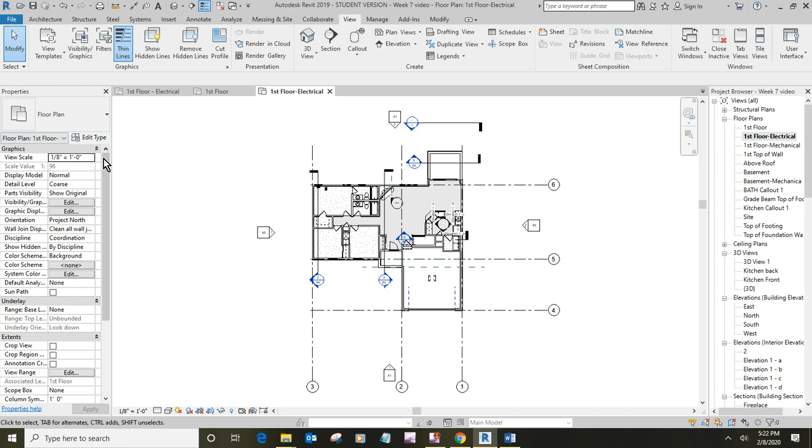All right, looking at my notes here, we duplicated that. We're going to make some changes over here, make it a 1/4 inch plan. For discipline, we may have to flip back and forth between coordination and electrical, but we're going to go with electrical to start with and apply that.

That grays out all of our walls, gets rid of all those notes and dimensions, those pesky things that we don't really want. Was there something else I needed to see here? Not for right now. Okay, if you have a template applied, we want to change that back to none.

Now let's set our view range. We're going to go top of wall for the top because we've got that sloped ceiling that we've got to be able to pick up, so I'm going to make that 4 feet. I'm going to leave it at 6 inches. My cut plane, I can leave it, but I'm going to make that 4'6" so it'll be above the wall switches. Bottom can stay at 0.

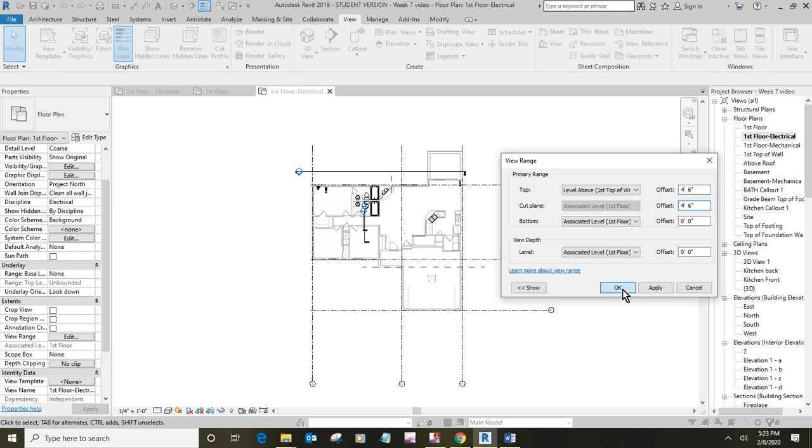Okay, now since we popped this over, our discipline over here to electrical, there should not be any ductwork. Well, we got some showing up right there. Oh, put them in the video thing. So let's go to visibility graphics.

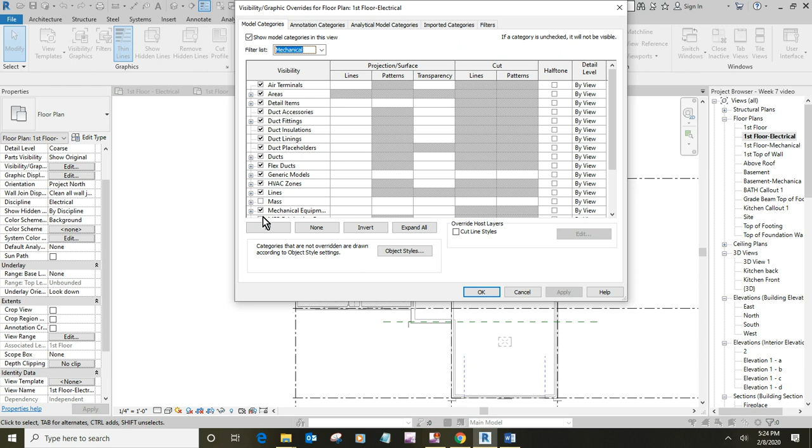And I'm going to turn on mechanical and turn off architectural. And I'm going to go select all, and I'm going to unclick all of them and go back to none. Let me see how that works.

Oh, it got rid of my detail items, so let me turn my detail items back on. There was something else, generic models maybe. Yeah, okay, so I'm going to leave those turned on. Lines, and let's see, I want to come down here to, oh, they're not showing up.

All right, so that's got those things taken care of. Floors, now that was just mechanical. Okay, now I'm going to turn my architecture back on, and of course there's a bunch of things in here that I can turn off. I got no curtain walls in here. Door stuck, the electrical should be turned on there. Entourage - I don't want no stinking entourage.

Okay, for floors, I want to hide my surface patterns. Got no parking inside, no planting, no roads. Roofs, got no roofs, no shaft openings, no site, no topography. Okay, those things.

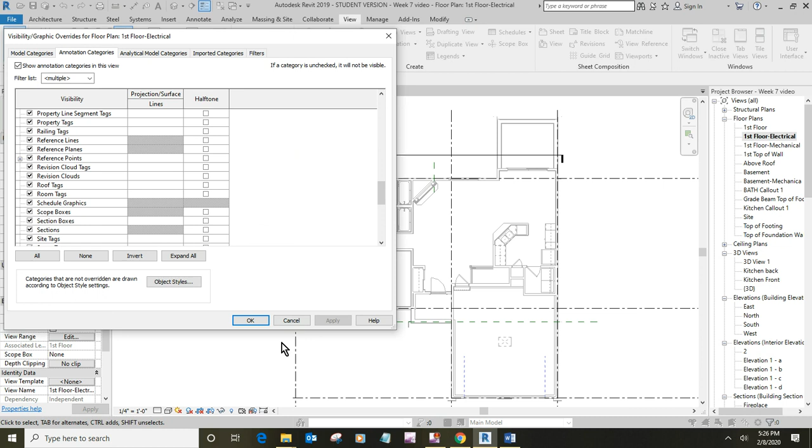Okay, they did not copy over. So we'll want to tag the rooms, and I'll show you my finished plan right here. We're using the same room tag families that we had before, and we just want to hit the major rooms. We don't need the closets and the hallway tagged, just tag your major rooms.

We want to make sure that attic access is showing, if that thing got turned off in visibility and graphics. The closet shelving is maybe okay - let me go back and look. Yeah, closet shelving would be okay, but definitely want to make sure the attic access is shown.

All right, now we're going to place some lights. So in doing that, we're going to go to our reflected ceiling plan for the first floor. All we're going to do is use this to place our lights, and I'll give you the finished drawing so you'll see what they look like.

But we're going to bring in some light families. So we're going to go Systems, Lighting Fixtures, and yes, we want to load some. Let's go to Lighting - I had architectural on my notes here, internal.

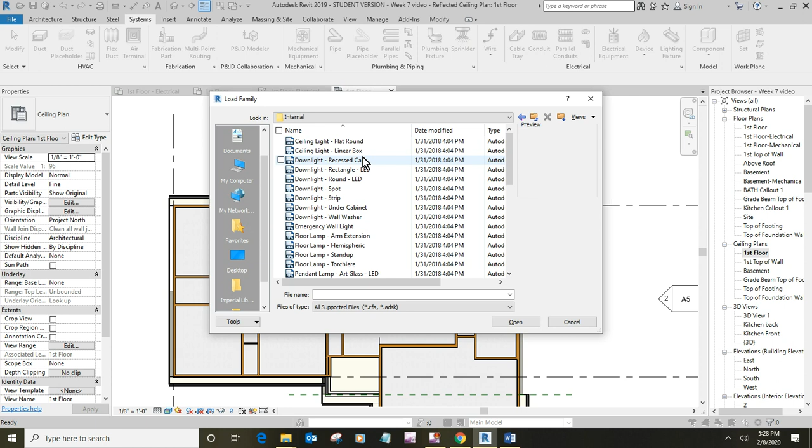And the first one, I want to bring in this ceiling light flat round - that's what I want to bring in first. Okay, and you look at it, there's options here for the wattage and the voltage. Everything we're doing is 120 volt, so I'm just going to stick with that.

And the elevation right now is set at 8 feet, but when we go to put it in, it's going to snap - it should snap to the ceiling.

Trying to think where these go. I'm pretty sure there's one here. I'm just going to pop a couple of them in here for you to see. Okay, so there it is in my reflected ceiling plan looking up. If I go to my electrical plan, there it is in my electrical plan.

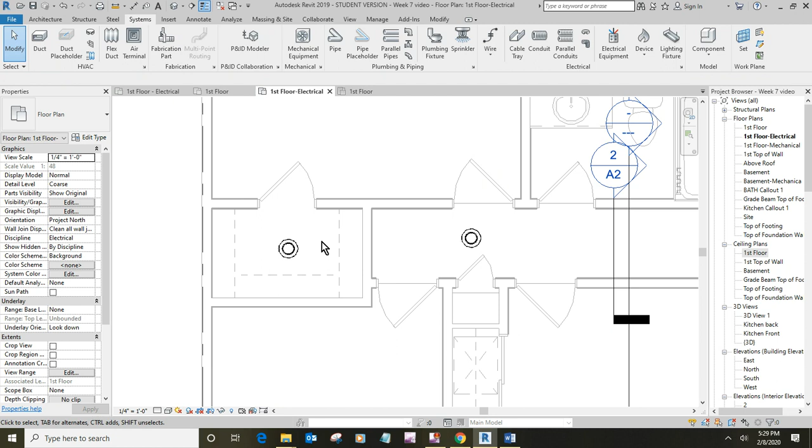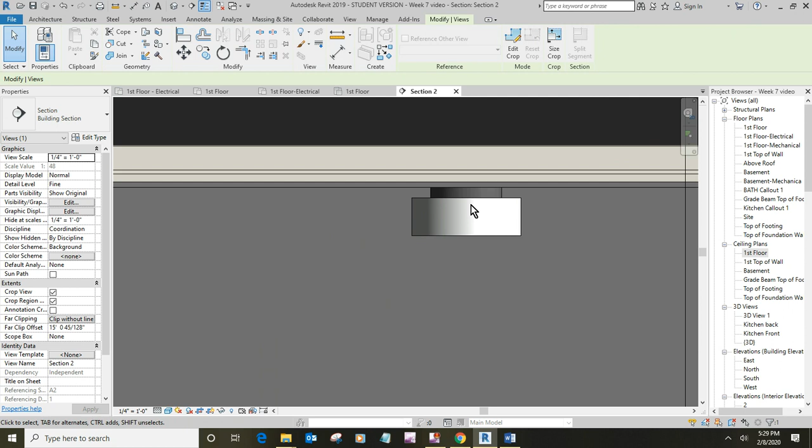I'm going to pull that section through there. And so here is the light itself, and you can see it's attached to the gypboard ceiling, which is this right here. Okay, so let's go back and look at this plan.

So we've got surface mounted lights here in the hallway and in the foyer. The kitchen gets mostly recessed can lights. I got surface mounted lights in the garage here. Recessed can lights in the kitchen and the two porches, and I put ceiling fans in the 3 bedrooms.

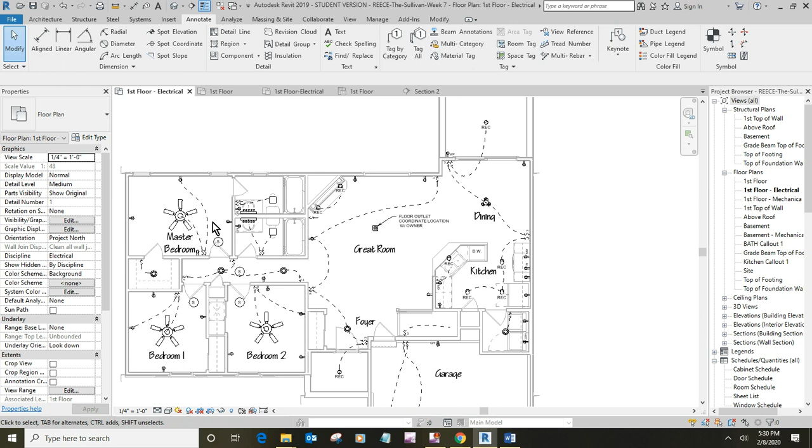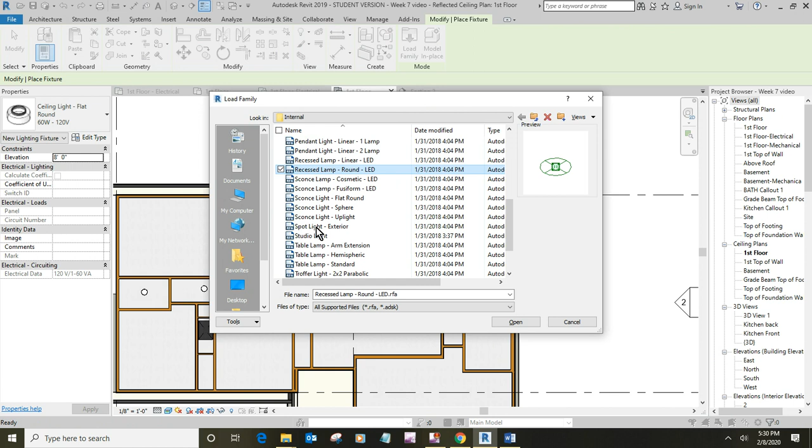All right, so let's go back to the reflected ceiling plan, and we'll bring in the recessed can lights. So we're going to go recessed round - yeah, that's what I want, recessed round.

And I'm pretty sure just a 4-inch trimmed downlight is what I brought in previously.

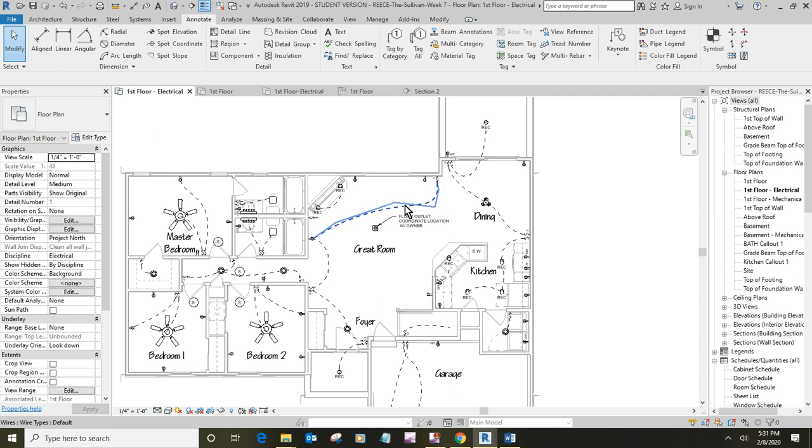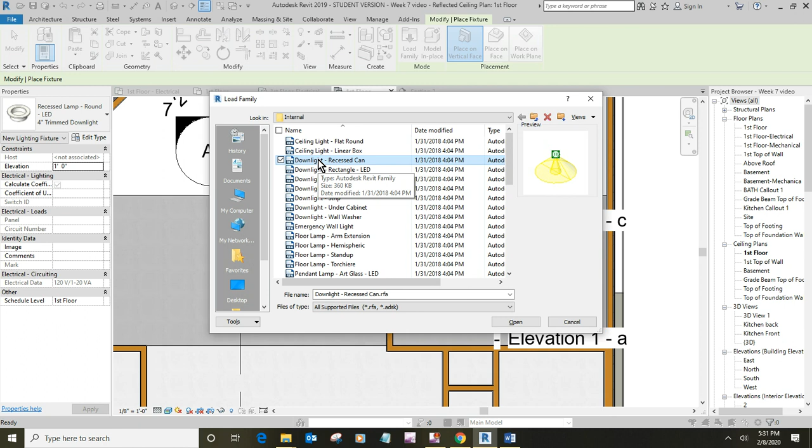And what you want to do - hang on just 1 minute. Downlight recessed can. Okay, so that was the wrong family that I loaded. Let's go back. Sorry - ceiling plan, systems, light fixture, load family, recessed, downlight recessed can. That's what I wanted right there. Sorry about that mistake.

Okay, and now this is going into a ceiling, and you can't see your cabinets here, so you just have to know that you need like one, two, three, four - I think 5 lights in here, 4 lights. So place you some lights.

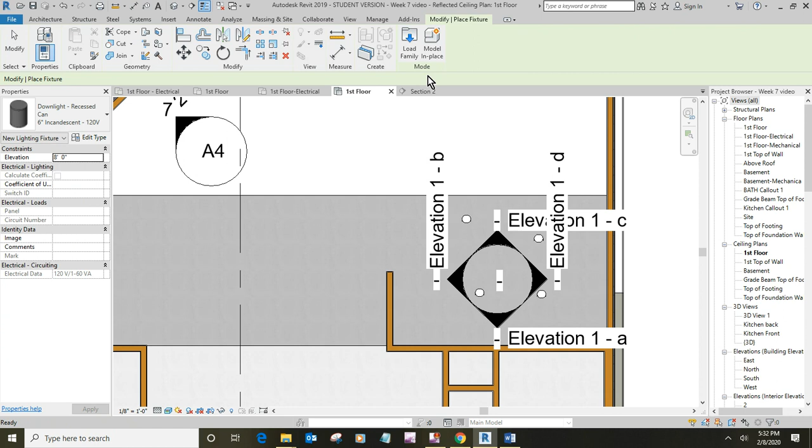I didn't even think to look at the options on that. Okay, so there's not a choice on where to place them out. All right, so place a number of them in there and then go back to your floor plan, and then you can see them to get them in the right

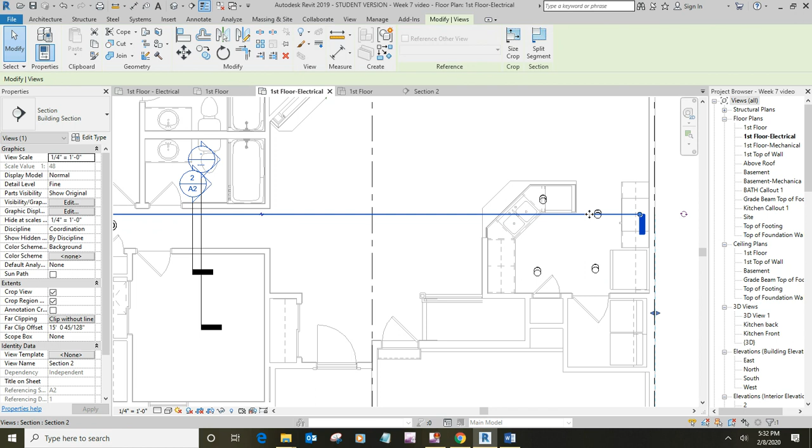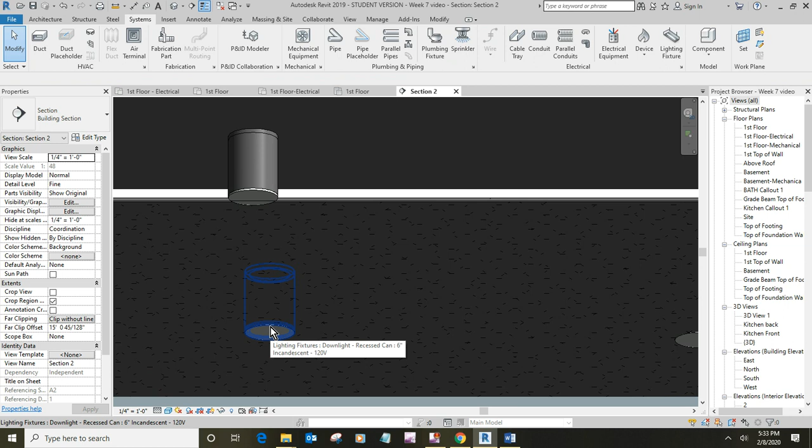location that you want. Now then, let's go to our section view and we'll look at. So here's what they look like right here. Okay, and if I do not crop my view, there's what it looks like going up into the ceiling. But it's popped right there onto the front of the ceiling.

Now I'm giving you a couple of the fixtures. I'm giving you the chandelier and the ceiling fans. So let me go to where I've got those saved at.

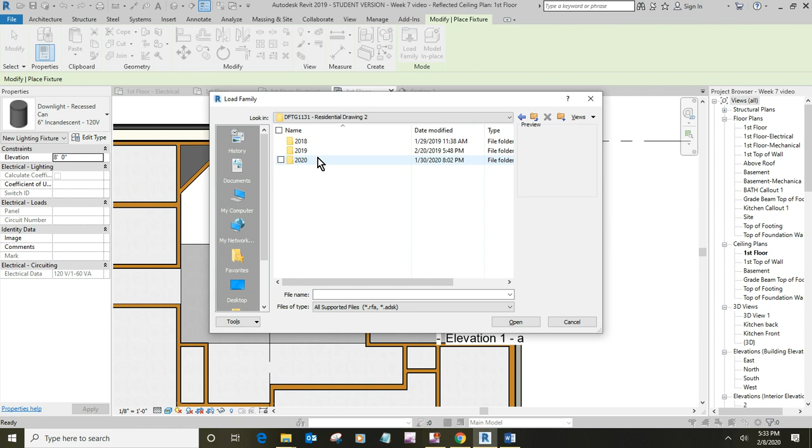The 3-light chandelier edited. Well, you're going to need all of these things here. So I'm going to go ahead and import them in. I noticed my ceiling fan was not in there, so I'll have to move that over. I'll have to copy it.

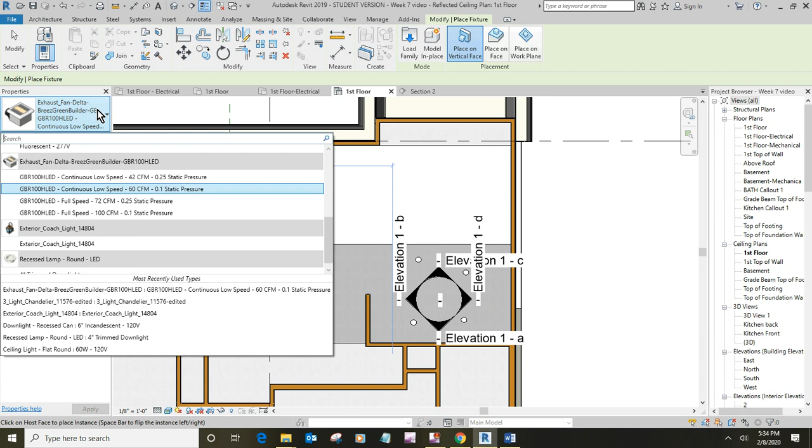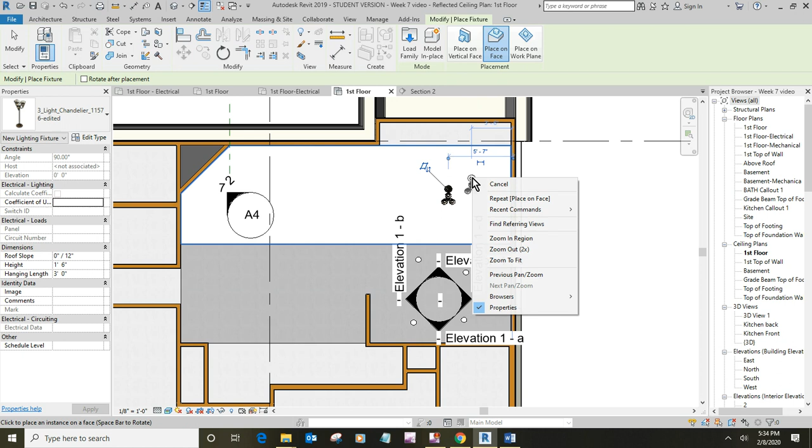All right, so let's go to this, the 3-light chandelier. Okay, and you see the options up here. So I'm going to go place on face and put it in my dining room area. Now this is kind of an interesting light fixture. I found it on Revit City, and then I downloaded it, but I had to edit it to get it to work right.

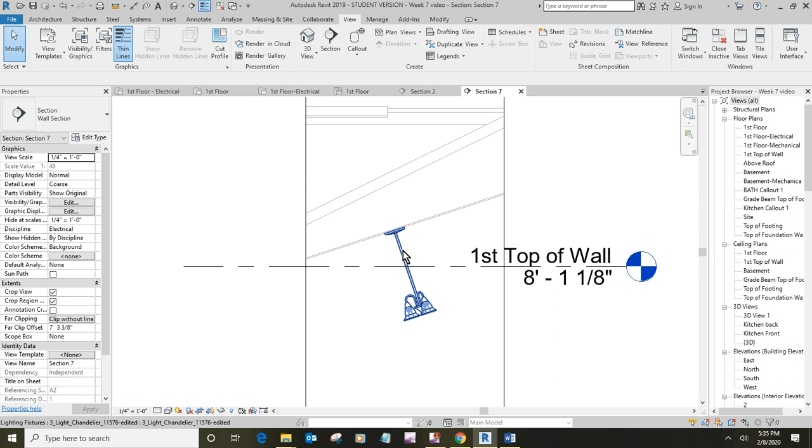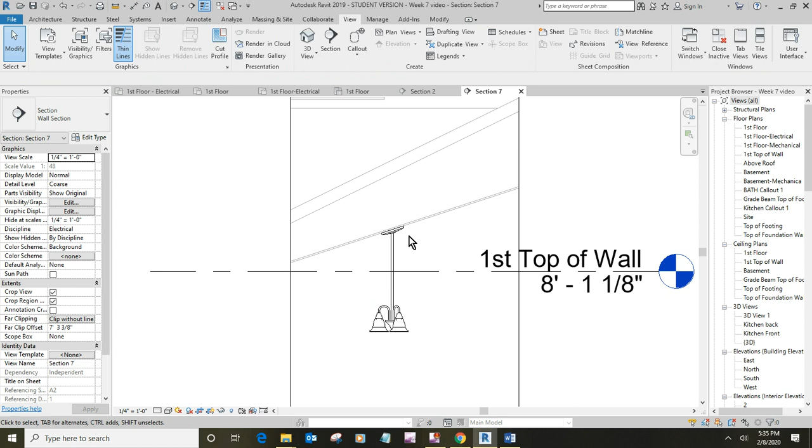And one of the issues with it is we have a sloped ceiling, so anything that hangs from it is going to be perpendicular to the ceiling. But this one could be edited for an angle, depending upon how you put it in. So I set a negative 4-inch slope, and it makes it vertical. Oh, isn't that sweet? It's not the best family in the world, but I found it. I just had to do a little editing to it to make it work. All right, so there's my chandelier.

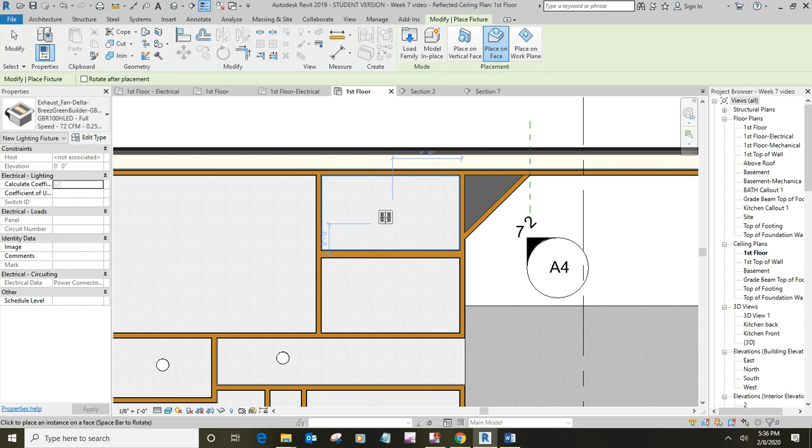There were bath fans in there, so let's go back. The exhaust fans, and go with either of these two here, full speed fans. And you need to be in your reflected ceiling plan, but you want to go place on face. And now you can see it, it pops up and you can see it there. Okay, now you're going to have two of those, one in each bathroom. So let me pull my section view back down.

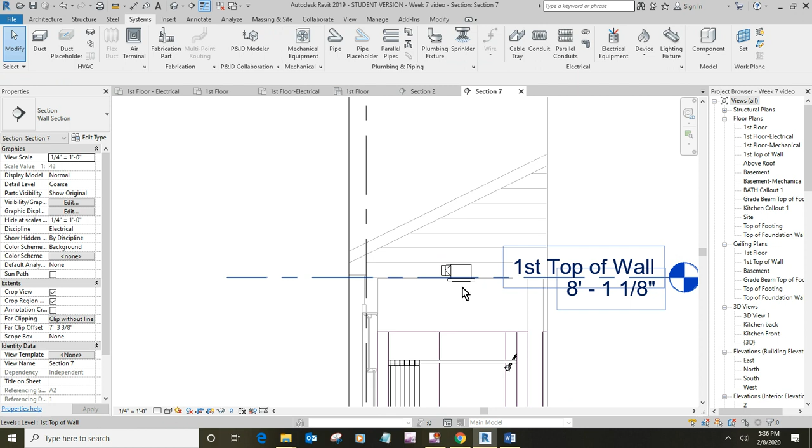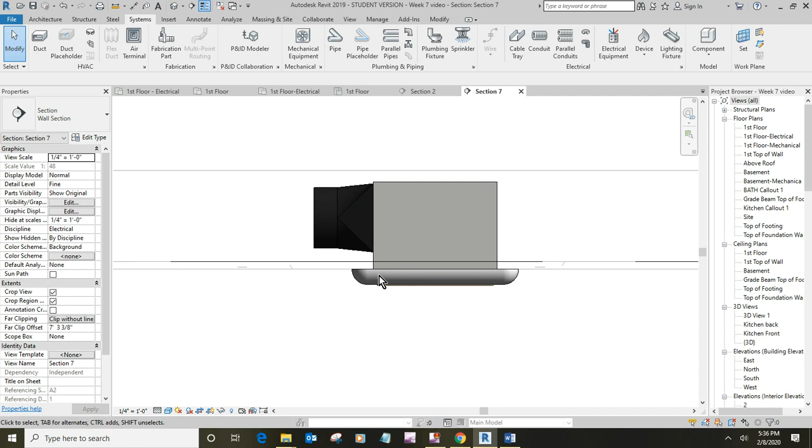We've had an issue with these in the past in that they wanted to go in upside down for some reason. But I think if you use that option, place on face, and attach it to your gyp board ceiling, it'll go in just like that. Okay, and let's give us some color here. All right, and so the trim on the bottom of it should attach right to the bottom of your gyp board ceiling. Okay, so that was a bath fan.

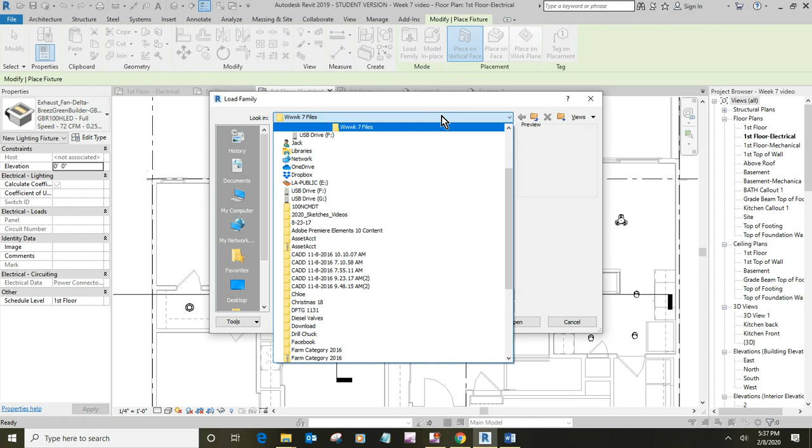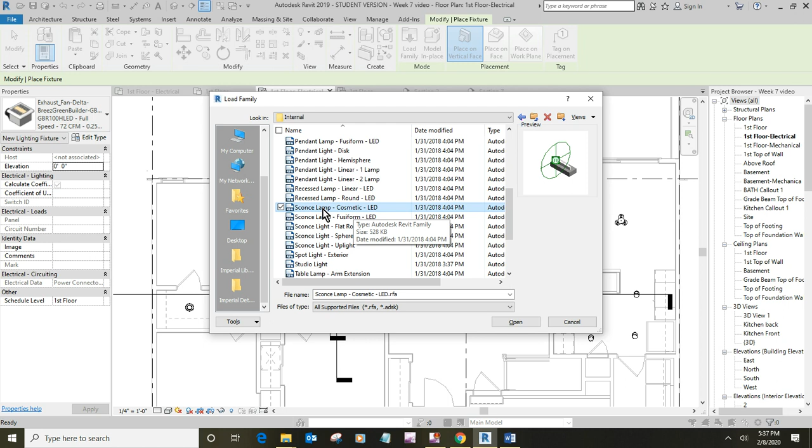There's wall lights in the bathroom, and let me go back to my library and I'll show you where those are. Lighting, architecture, internal, and I used a sconce. I have to look at my notes and see. Sconce wall cosmetic. And that is not. Oh, there it is right there. Sconce lamp cosmetic LED. I think that's it. So let's pull that in. And I'm going to go place on vertical face. And of course, you're going to have two of them. Okay.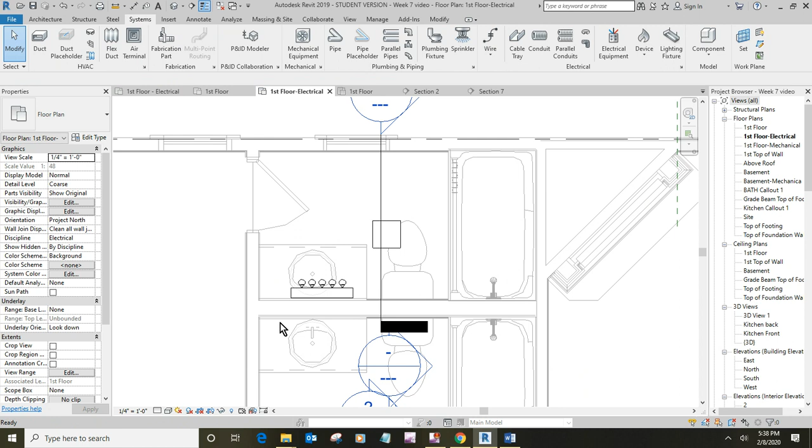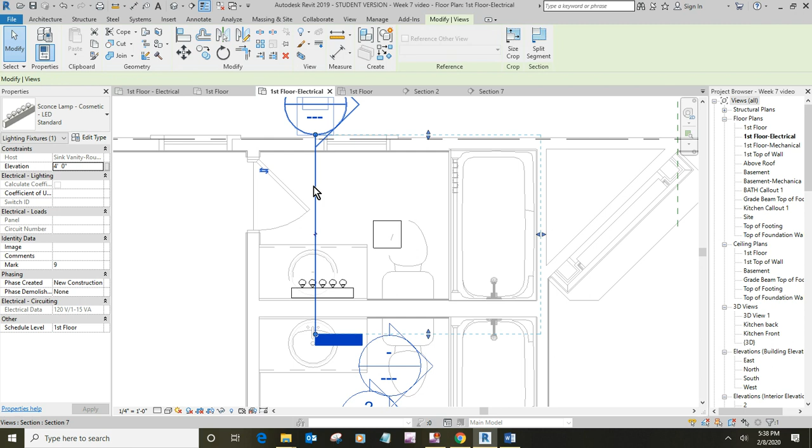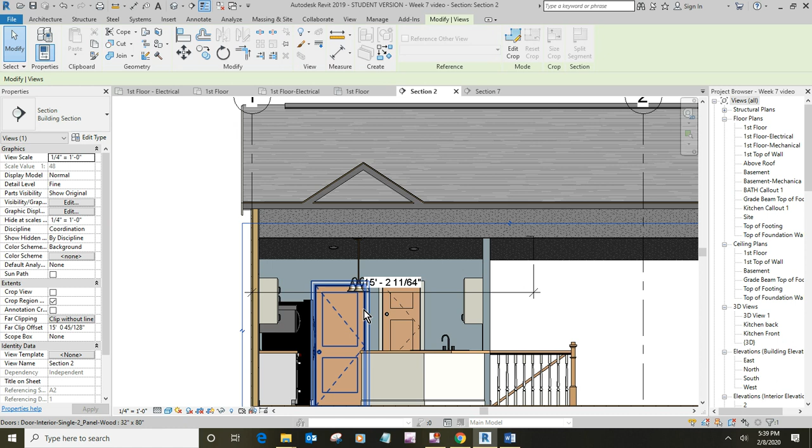And now let's pull our section view down. Okay, but as you can see, it's not attached to the chipboard. Let me adjust my section here. Oh, wait. Wrong wall. Okay, so I need a section looking the other way. But anyway, let's see, where is this one? Let's pull it here. So I want to pick a new host for it.

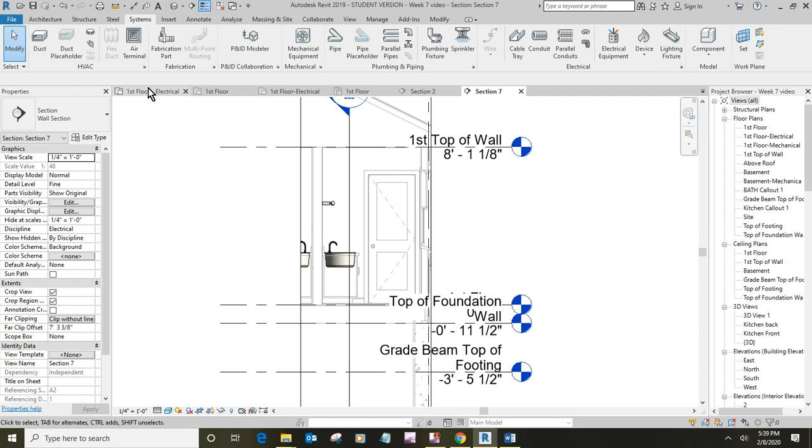That got it attached to the wall, and then I want to set my height on it and get it centered over the sink. And let me look back at my finished plan. I have it set at 6'6". Okay. So yeah, set it at 6'6", get it centered over the sinks. The bath fans here were centered over the toilets. That will work. And let's see.

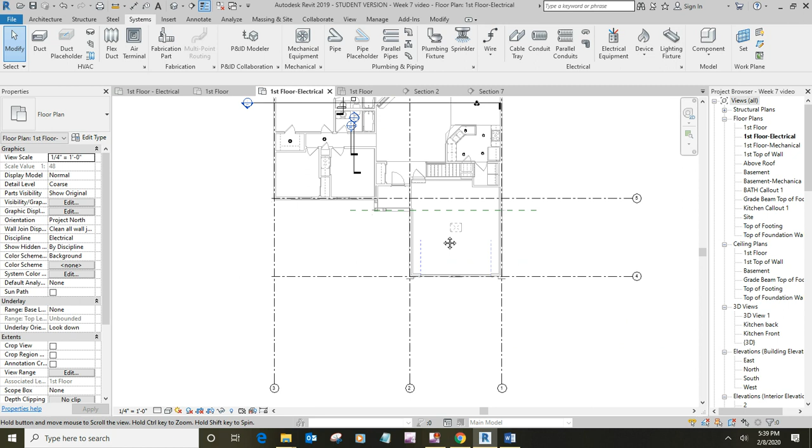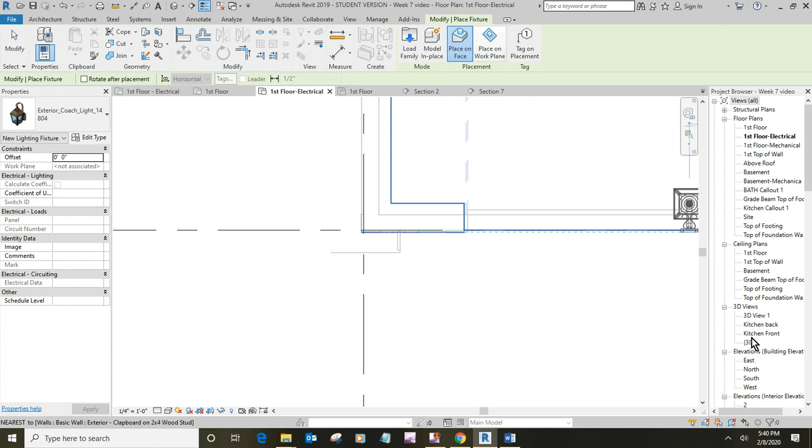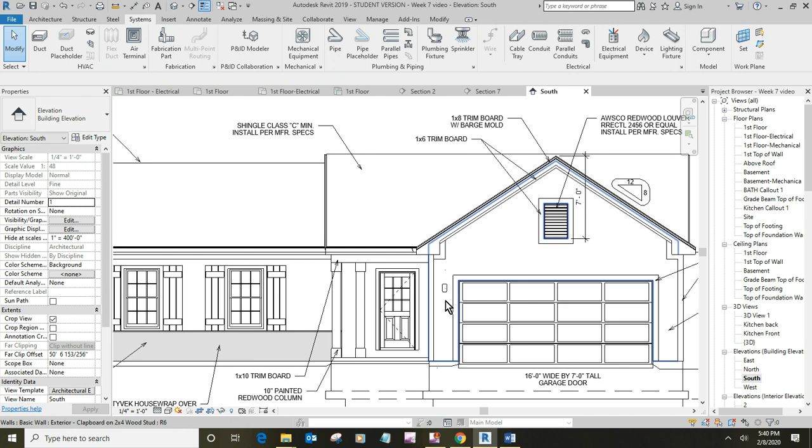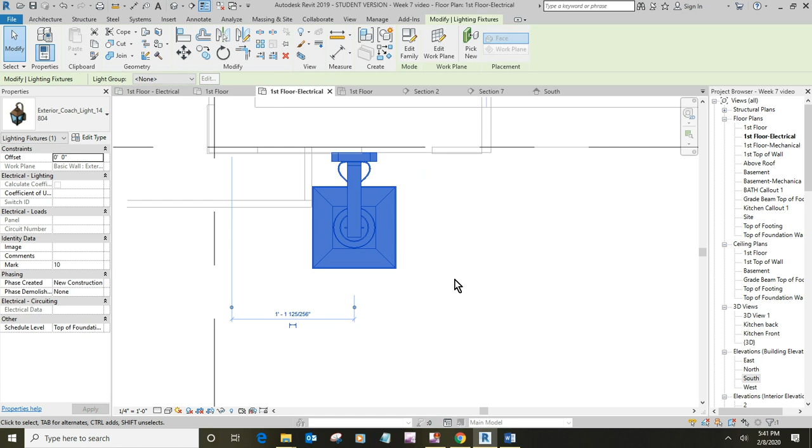Out here in the front, I'm giving you those exterior coach lights. Oh, you got to be in an elevation view to put them in. Sorry. Okay, so you put one on either side. They pop to the inside. It did it to me like that last time, and I'm not real sure why it did that. But these came off of Revit City, so that could have something to do with it.

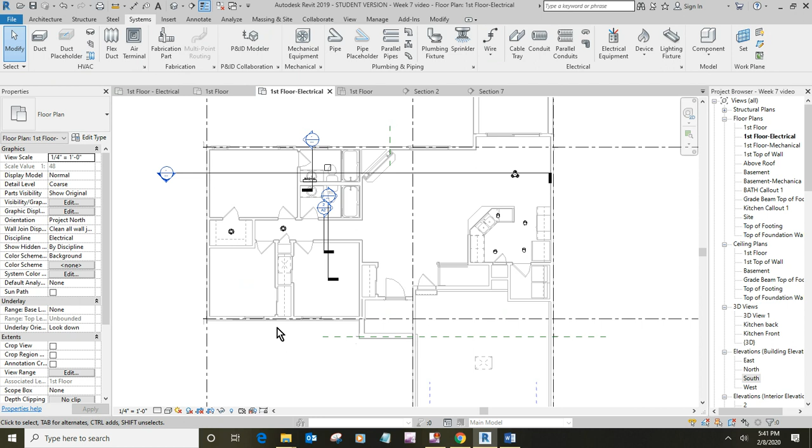Okay, so you'll put both of those coach lights in, adjust the height, and adjust the left to right so they're centered between the trim boards. Okay, and the ceiling fans, I'll hit those in the next video.